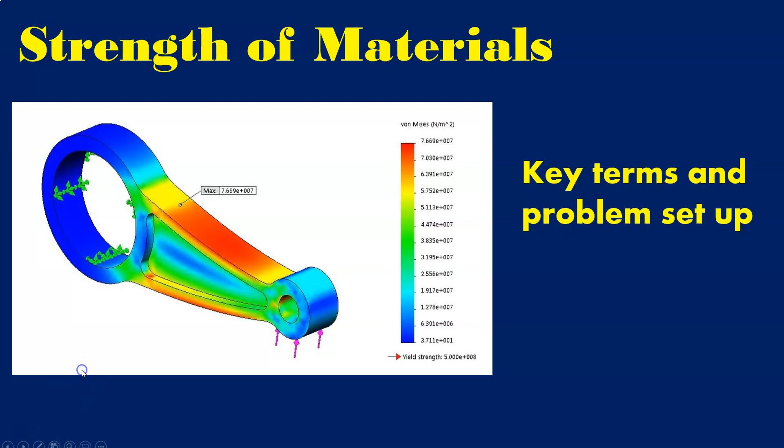So let's go here and we'll get you to the objective. So here's what we're going to cover in this one. We're going to go over the equilibrium of a deformable body, look at the types of loading conditions, the types of reaction forces, break those down a little bit, look at the method of sections, which is going to be a major part of the class, and then sign convention and some concept of deformation. So really these are going to be terms that we're going to use throughout the rest of the semester. They might change a little bit in terms of how you apply them, but the general terms are going to stay the same.

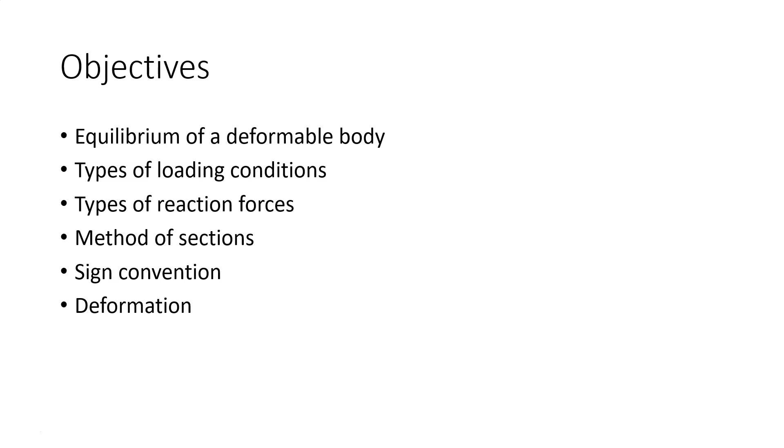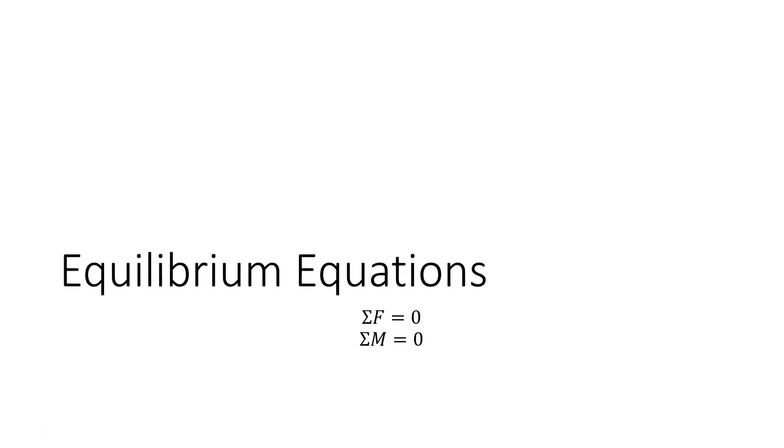But first we're going to look at the whole concept of equilibrium. Now, in this class, we're going to look at most of our problems in the state of static equilibrium. If you have a rigid body or even a deformable body, and you're looking at it in terms of this strength of materials class, when I say static equilibrium, what I mean is that the object is not being put into motion. It's not being accelerated. It is basically staying kinetically put. So all the forces that are being applied should sum to zero, and any of the moments that are being applied to the object are set to zero.

And when we describe this as static equilibrium, we can think of it in the Cartesian coordinate system, the X, Y, and Z coordinate system. We can think of this in terms of motion. So if you have an object and it is literally moving, sliding, falling, or whatever, you can break all of its motions down into 6 degrees of freedom. And those 6 degrees of freedom give you 6 equations for static equilibrium. So we can break it down into the 3 translational directions, X, Y, and Z. That's just your normal coordinate system.

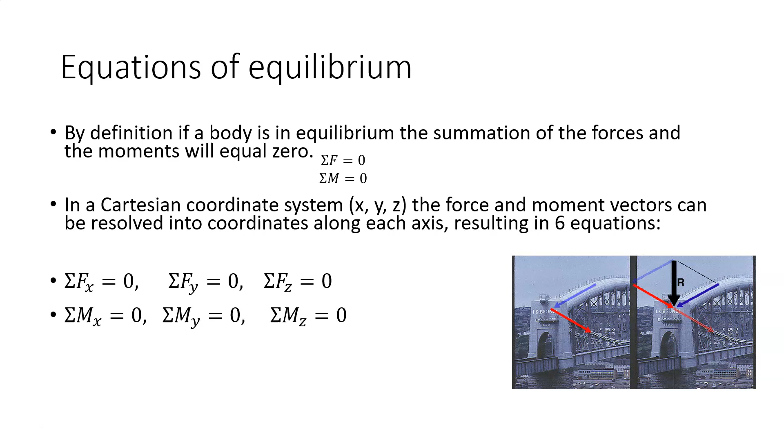And then the other degrees of freedom are rotational: rotating about the X-axis, rotating about the Y-axis, and rotating about the Z-axis. Those are all the degrees of freedom that anything has when it moves, and that creates these different equilibrium equations. So the sum of the forces in the X direction should be 0. Sum of the forces in the Y and the Z should be 0. So those are all your translational equations. And then the rotational equations are the moments about the X, Y, and Z axes as well.

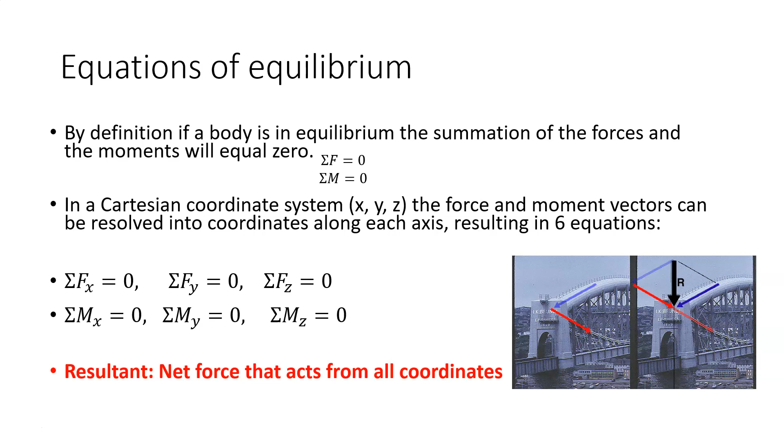And again, the resultant is just the net force that acts from all those different coordinates. So if you have an object with a load coming from a direction that's not perfectly aligned with an axis, it will have a resultant force that you can break up into different vectors along these 3 axes, and that's your resultant force. Now, those are the summation equations for equilibrium.

Now let's look at the different types of loading conditions. And there's a few different types. There's actually 4, but I'm going to give you 1 initially and then 3 more that follow. And I'm separating this out because it kind of fits its own little category. The first type of loading is a bending moment. We talked about that in the last section.

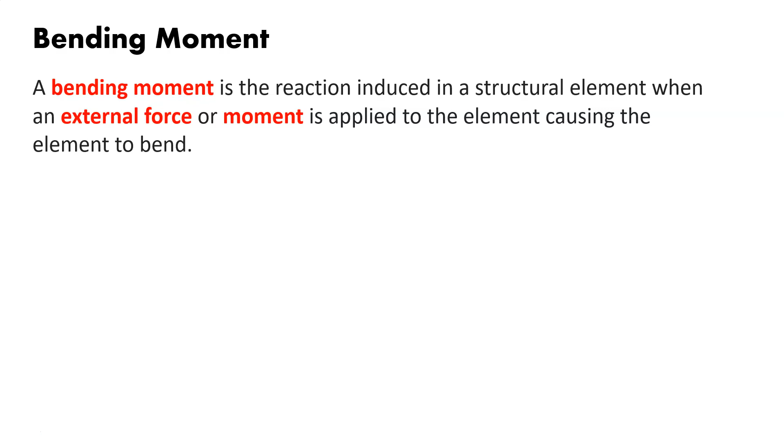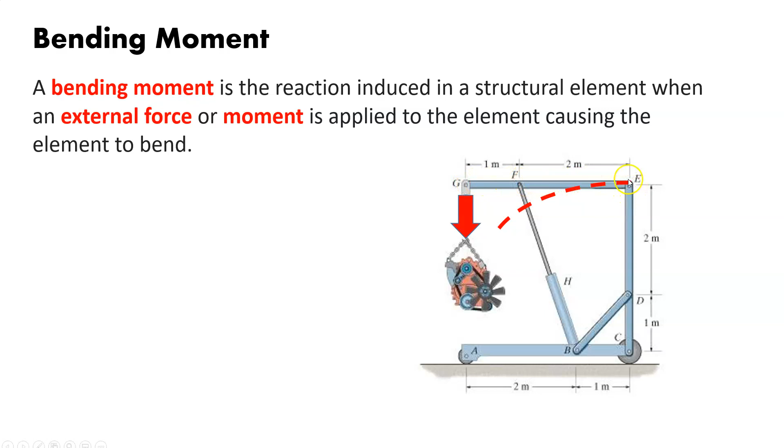It is whatever the load is, the weight of that engine, multiplied by this distance about this particular point, or a particular point, this origin. So the force times the radius, and that radius is from that reference point. Typically in most of your kinematic and static and dynamic books, that is just called a reference point of O.

Again, in a static equilibrium, the sum of the moments should equal 0. So where there's a moment here, there is a reaction moment taking place within the material that counterbalances it. And the sum of those, one positive, one negative, or several positive, several negative, depending however this moment is going to be summarized, should come out to 0, or will come out to 0 if you're in static equilibrium.

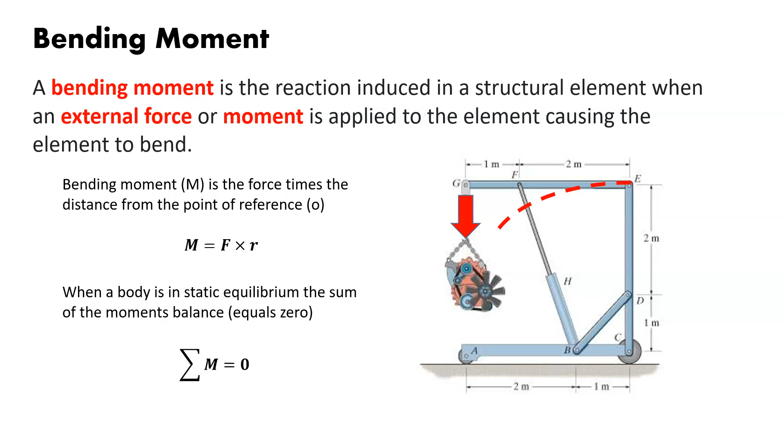Now, that's one. Now, here are the other 3 types I want you to be aware of. One is the external loading, also known as surface loads. Then you're going to have another type of load you'd be concerned with, which is your support reaction. So if you have a physical body, you've got surface loading on that body, on that structure, that bridge, that axle, that table, whatever, it's going to have an external load applied, or a surface load. It's also going to have a support reaction from that.

And you can see this again in a lot of your kinematics and statics classes. And then there's a third one that is a little less intuitive, which is the internal reaction. Now, I have this diagram here that shows the different types of loading. These are called distributed loads. There's 2 primary ones that we're going to be concerned with.

One is a rectangular load, which is also called a uniform load. It is made up of a load that is distributed across a surface of a certain length, and it is rated by load per unit length. The gradient load, the triangular load, has the same concept of a load per unit length, and it is going from 0 up to a maximum amount. And it's also got a measurement of load per unit length.

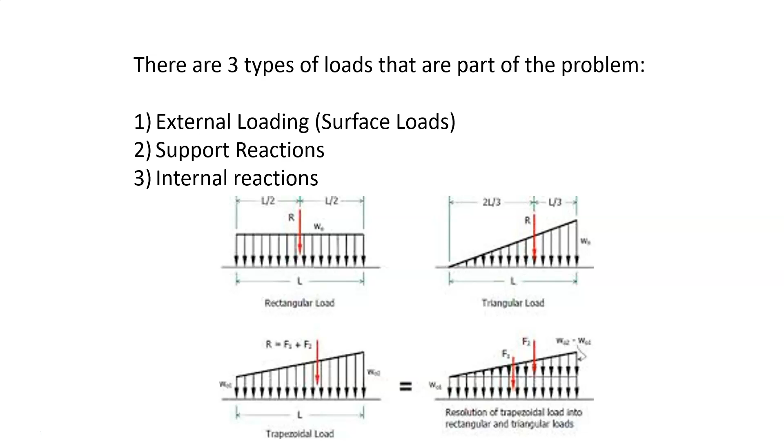So going more into this, again, we're still talking about static equilibrium, but when you're dealing with potentially a deformable body, you can get things such as, which we'll go through in the next chapter, a part bending, flexing, or changing its shape, but it's still going to be in static equilibrium. So here's some of our definitions.

Put those in red. The surface load or external loading. These are forces that are acting on the body. They can be distributed or concentrated. And then we've got body forces, which is things such as the weight due to gravity, which would also fall under, even though it's part of that, it's still considered an external load. So those fall under that first category.

And then we've got something called the support reactions. Now, when you look at this through your statics class, which is one of your prerequisites, that would be where you'd have a weight or body forces, which also falls under your external, and you're going to have a normal force coming back, reacting. And same you have with this little free body diagram where you have the weight, the body forces, and a normal reaction force. So you got this concept of the equal and opposite that you learned in your statics classes.

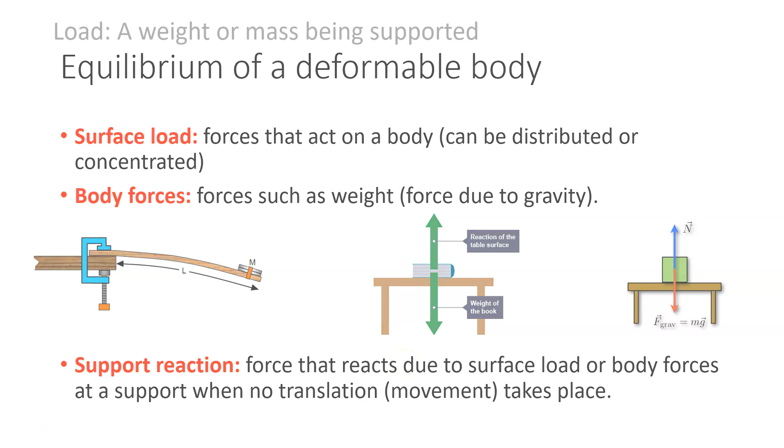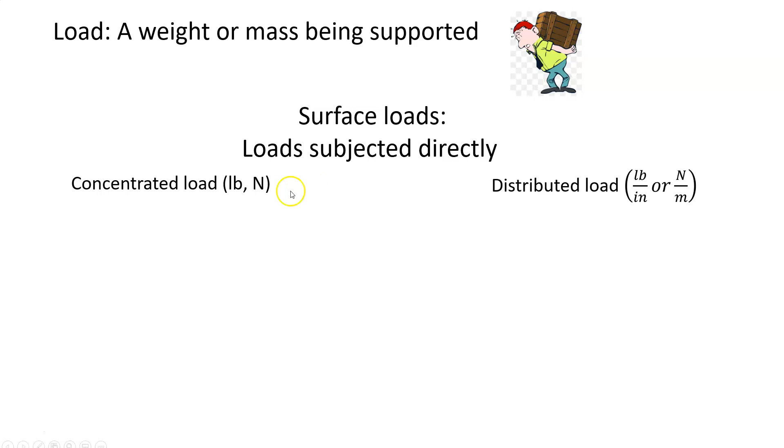So going a little bit more into some detail, just to cover things a little bit more. This is your concentrated load. So another example of surface load, external loads, and they're not considering the weight in this particular case necessarily. So this would be a concentrated load that we looked at in the beginning. And then this is subjected at a specific point.

And you got the distributed load. And notice the units: force per unit length, force per unit length. And down here, you got force per unit. So 5 newtons per meter, and it is distributed across 6 meters. And this would be the effective load. So, 30 newtons. So again, that's 6 times 5 newtons per meter, which comes out as 30 newtons.

And this is just how that problem works out. How you went from this to this effective load acting in the center of the 6 meter distribution. So 5 newtons per meter, 6 meters across. So 5 times 6 is 30. And notice the units cancel out. So that's how you end up with an equivalent or effective load of 30 newtons.

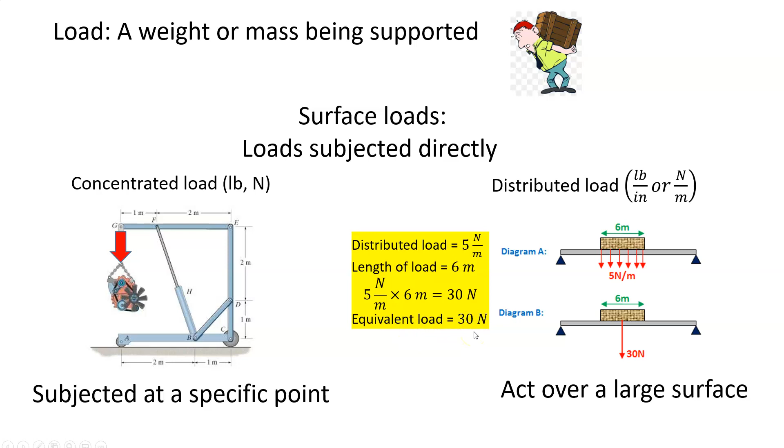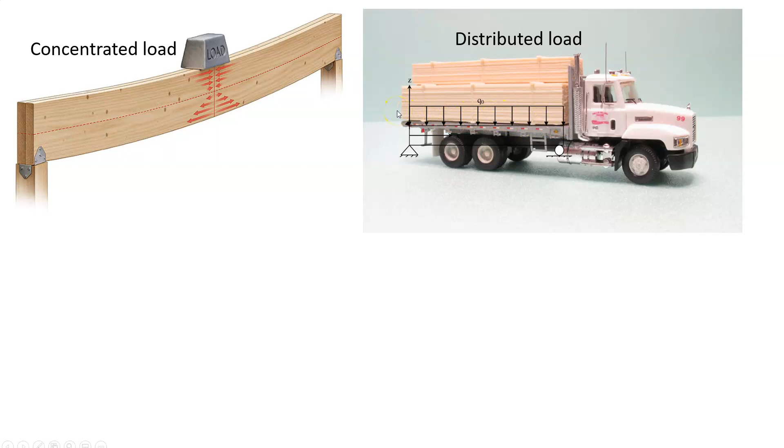And just another picture of distributed versus concentrated loading. You see in this picture here, you're distributed across the truck bed, whereas you're concentrated in the middle. So again, these are your distributed versus concentrated loading.

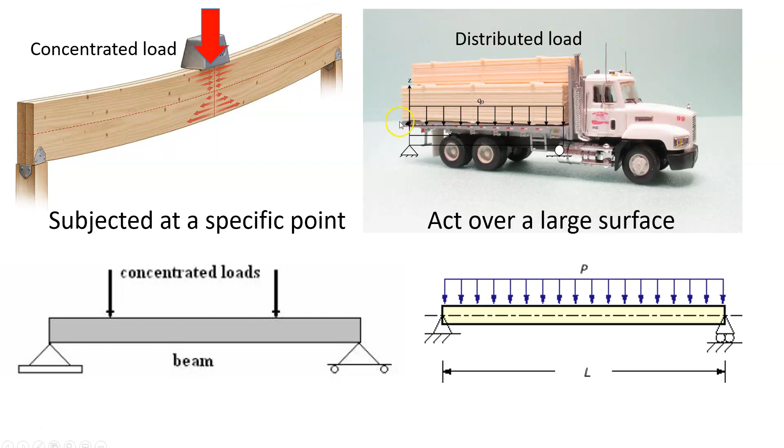And here's the picture I promised you, distributed versus concentrated loading. So you could have a concentrated load, also called a point load, or a uniformly distributed load. Again, this is your effective loads on your right, and this is the type of load on the left. So you can see you've got a uniformly distributed load, a triangular or gradient load, and this one is 1/3 from the heavy side, 2/3 from the light side.

And this is the more complex equation of a combination or trapezoidal load. What they did was this is the resultant of using a distributed load with a gradient load on top of it. And if you follow this equation, you can find out where that net effective load would end up.

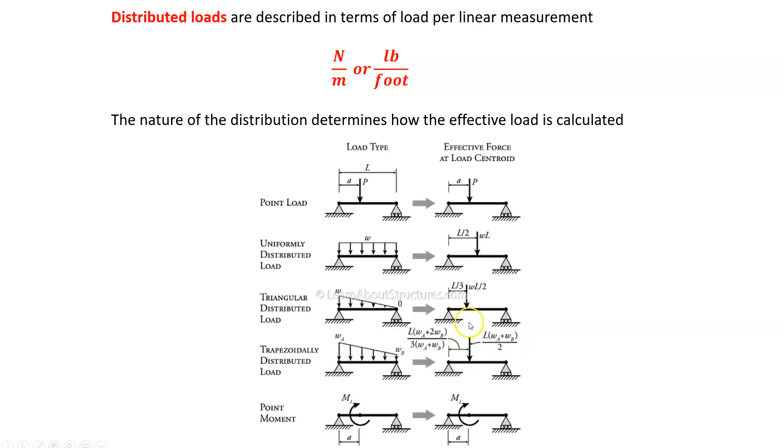Now, we were talking about the surface loads, our external loads, and then we went into our reaction loads. So I want to go into a little more detail in that. It gets a little more complicated than just the simple picture of force versus normal force or weight versus normal force. So there's a little bit more that you're going to see when you try to work an actual strength of materials problem. So again, remember you've got an external load or a surface load. They could be concentrated loads or a distributed load.

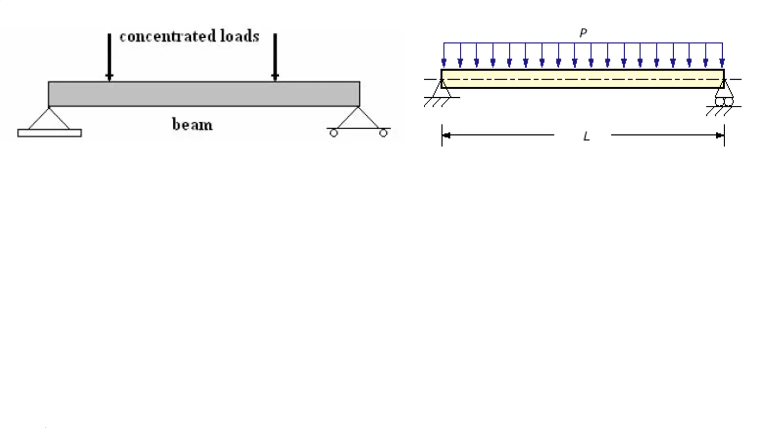But you're also going to have a reaction that's taking place. And you're going to have to consider what's happening with these support reactions. Now, again, remember you're still in static equilibrium. So whatever load you're getting here in the surface loads, you're going to have an equal and opposite reaction load in order for this thing to not move. It's just like any static problem you've worked with in your statics class.

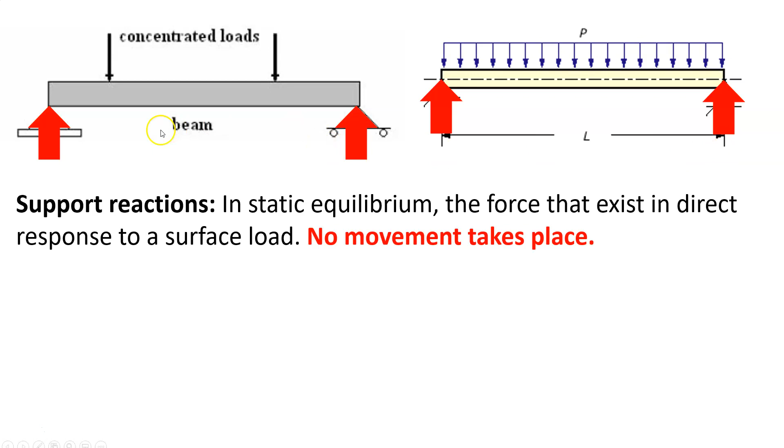So in support reactions, no movement takes place. It's in static equilibrium. So you're going to have a load and a reaction. In this particular case, there are just 2 points of reaction. That's where you're being supported. So that's where your reaction load is taking place. And again, the sum of those forces is going to be 0.

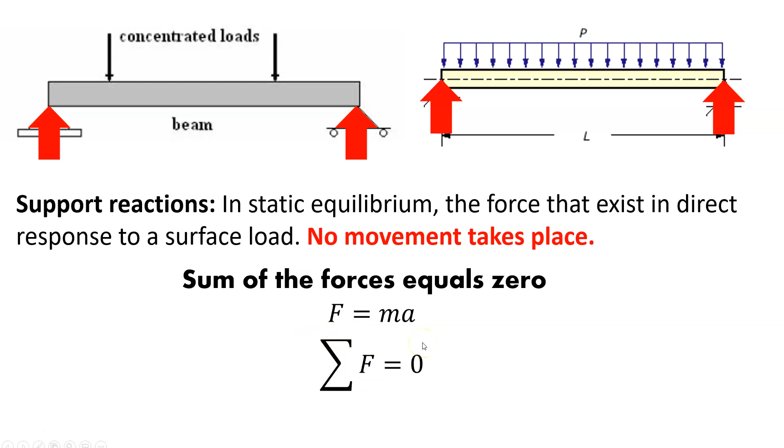Now, there's different types of reaction supports you're going to run into, which are going to give you different types of support reactions. So the type of support you're dealing with is going to be a very significant thing in how it's going to give you a reaction load. So if the support prevents translation in a given direction, then a force must be developed on that member in that direction. So think of it this way.

When you're standing on a floor, there is a reaction coming back at you upward, right? So as your force is coming down, there's a reaction coming up from the ground. We call that the normal force. If you were to lean against a wall, you're applying a force against that wall. The wall's preventing you, and so there's a reaction force coming back in the other direction.

Now, before I get into the third type of force loading, I want to start with method of sections. These two things tie together as far as how to solve a problem. The method of sections is a tool you're going to use quite a bit in this class for looking at the internal resultant loads. You're going to use this method of sections to find the internal resultant forces and moments that go on within a body. So this is, again, all three. And the way to find that is through this method of sections.

So remember, if we look at this truss, everything in black is the truss. Looks like some sort of a bridge. You've got certain external loads, surface loads of 10 kilonewtons acting at point B, point F, and point E. Those are external loads. Well, because of the way this bridge is sitting, maybe it has a drawbridge effect. It's being supported at one end here with a 15K reaction and another 15K reaction here, but maybe it rotates. Maybe this is a hinge, so you've got some sort of a reaction here at A. So these are all reactions.

If this were a hinged bridge, as it sits down, remember, sum of forces: 10 coming down, 10 coming down, 10 coming down. So that's a sum of 30 and an equal and opposite of 15 and 15. So 30 going back, so it's in static equilibrium. And because the external forces are all going in the Y direction, the one reaction that hinge would have in the X direction is 0.

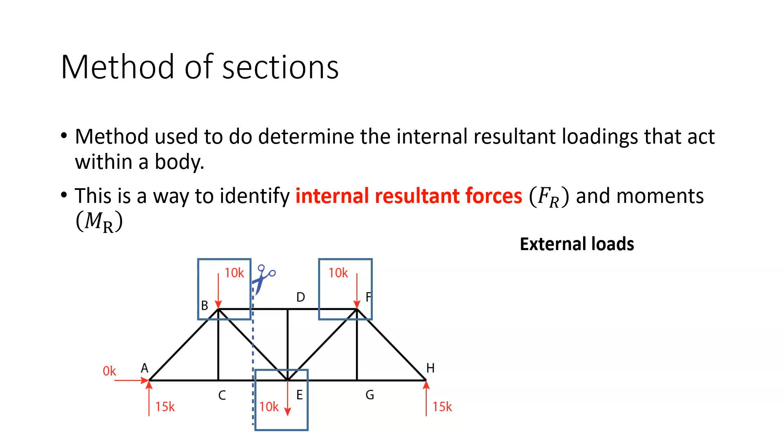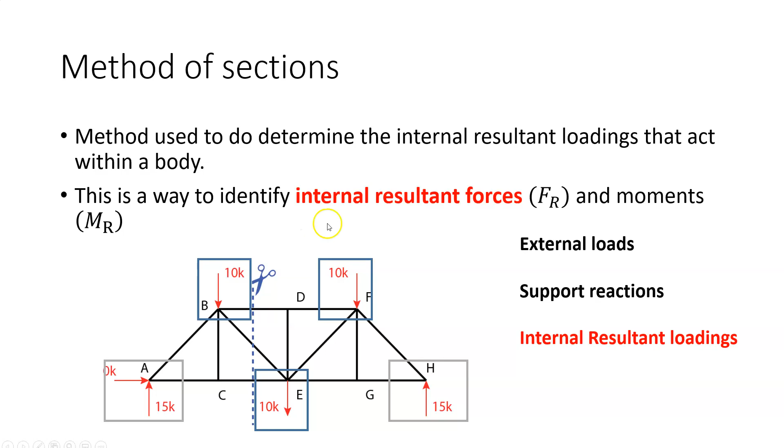Now, with all this, you're still solving problems. And since you've got things potentially going in two different directions, you can have loads going down in the Y or to the right in the X, or you can have a rotation counterclockwise or clockwise. You're going to have reactions coming back the other direction from external loads, positive up in the Y and maybe to the left in the X. So you're going to have all this opposition going. So you need to know what sign to attribute to things.

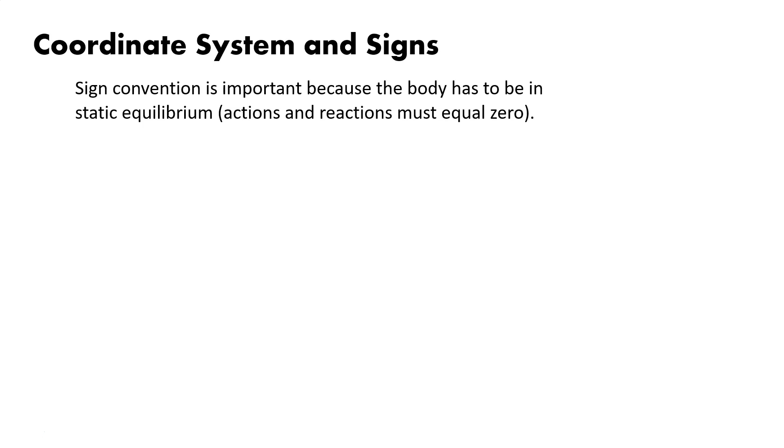So the coordinate system you're going to use, since we're dealing with a two-dimensional Cartesian coordinate system, is going to be important. You're going to have to establish this in your problems. So the sign convention is going to be important. Again, everything is going to equal out to 0. We're talking about static equilibrium.

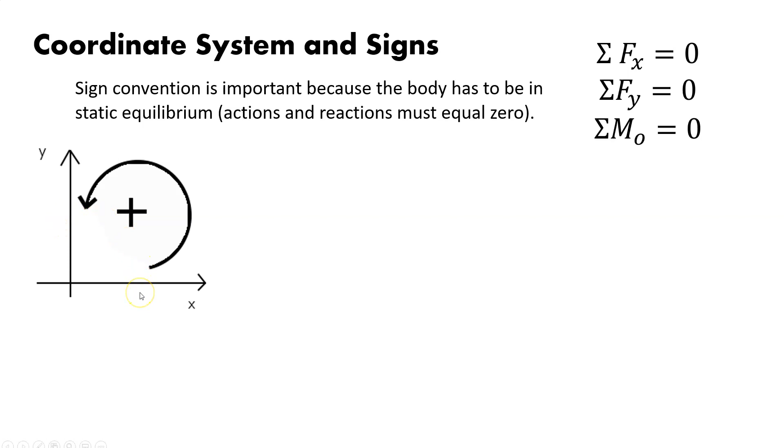So this is our typical sign convention. Typically. Now this can change. If we have a problem with an angle in it, usually you will rotate your coordinate system to match. But by and large, you usually have positive going in the up direction for the Y, positive going to the right for the X, and you go counterclockwise for moments.

Now, like I said, there are changes. The real key here is to be consistent with your coordinate systems. If you're going to change it, maybe there's some reason you want the positive to be facing down and the X-axis going to the left, but you've got to maintain that throughout the problem. Otherwise, you'll start to run into sign errors and potentially have major problems with your solution.

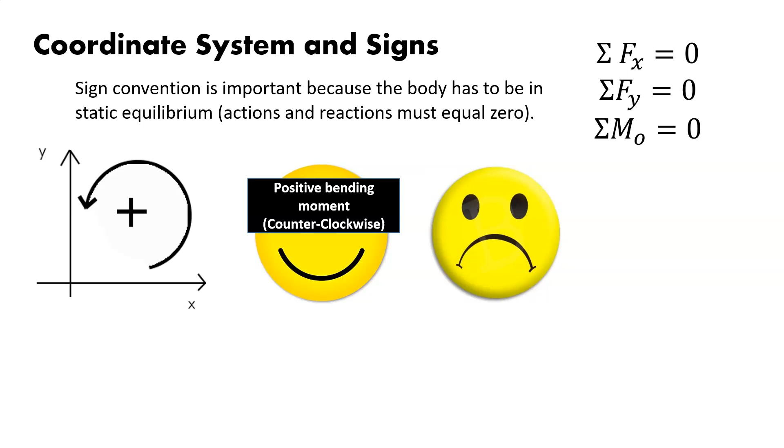But looking at just the moment section of this, which sometimes can be a little more confusing. If we look at going clockwise or counterclockwise as positive, and the way most problems are set up, you can think of it as with these two smiley faces. When you're going in this direction, you're positive, and when you're sad or upset, you're going clockwise or negative. So when you're looking at bending moments, counterclockwise is positive and clockwise is negative.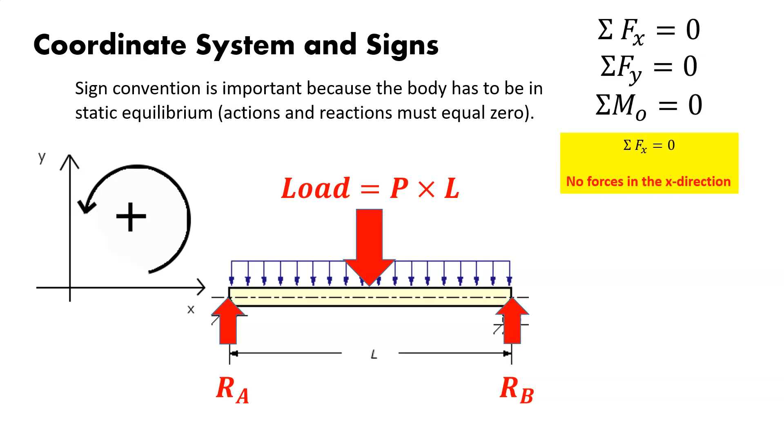Nothing is going on in the X, so your sum of forces is 0, and since you don't have an external load in the X direction, that one falls out. Your sum of forces in the Y direction should be 0, so that means the reactions, both going in the positive direction, and this one going in the negative direction, should equal 0. So reaction at A plus reaction at B minus the load should equal 0. They should balance. So that load should be equal to the reactions at A and B.

Now, if we wanted to find out how to solve for that, what we have to do is assume a moment about either one of these points. In this case, we're going to consider it about point A. Now, if we use the equation of distance times your load, then the load at A goes to 0 because the distance is 0. The load at B is the reaction at B times L. So that means that we've got a bending moment going counterclockwise.

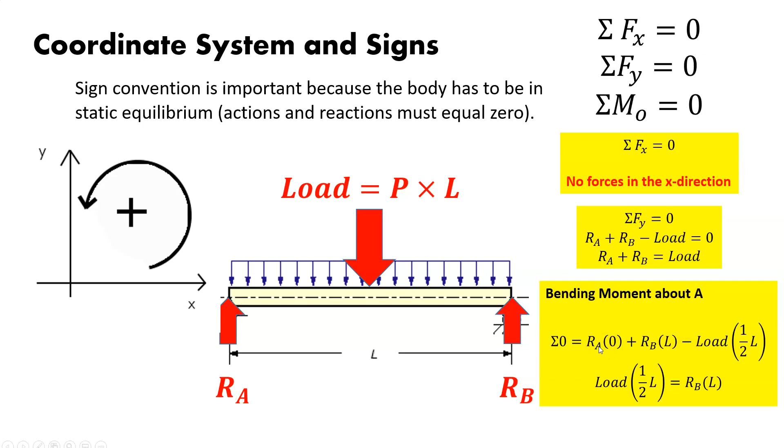And the load at C, our moment is this load, since it's going down, times this half of L. That's taken in the negative direction. So it's going down in this direction, rotating clockwise. And from that, we can solve for the unknowns. And the loads will sum to 0 again.

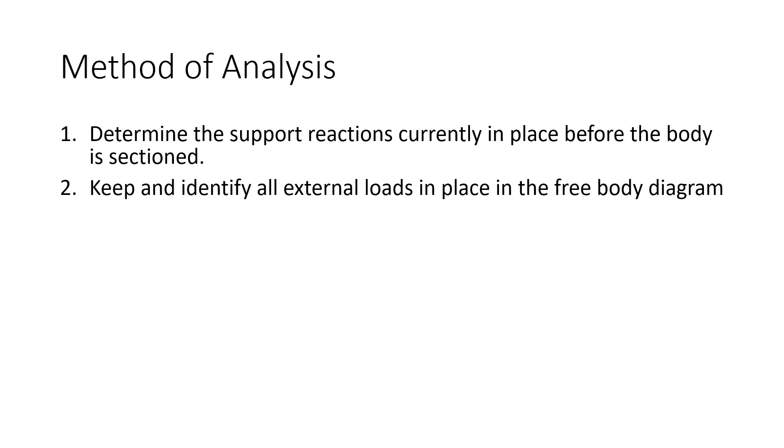So our method of analysis, the last part of this presentation, is how we actually set up the problem. The first thing you want to do is find your support reactions. So you have to set up your free body diagram. When you put all your external loads on your free body diagram, you can start to see what your reaction forces would be.

Now, if you have a section of interest that you're concerned with, now that you've got your reactions and your external loads accounted for in the free body diagram, you can get your resultant loadings. You also have to set up your coordinate systems, and your moments should be summed up at the section of concern where the resultants act to eliminate any of the unknowns. And for negative values of the resultant, the actual direction is opposite from the free body diagram.

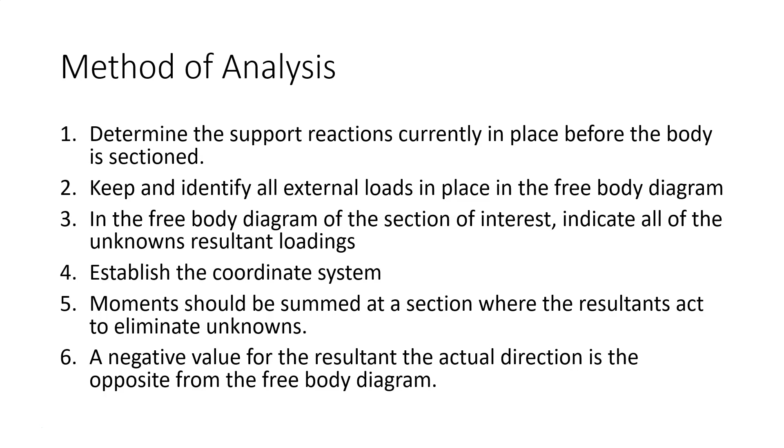So this is Professor Cummings, and again, this is to give you some key terms we're going to be using throughout the semester, as well as some of the things to look for when you set the problem up that you're going to be concerned with.